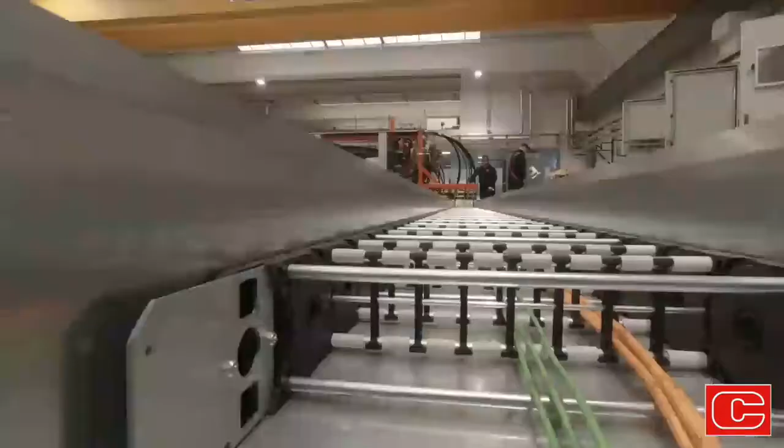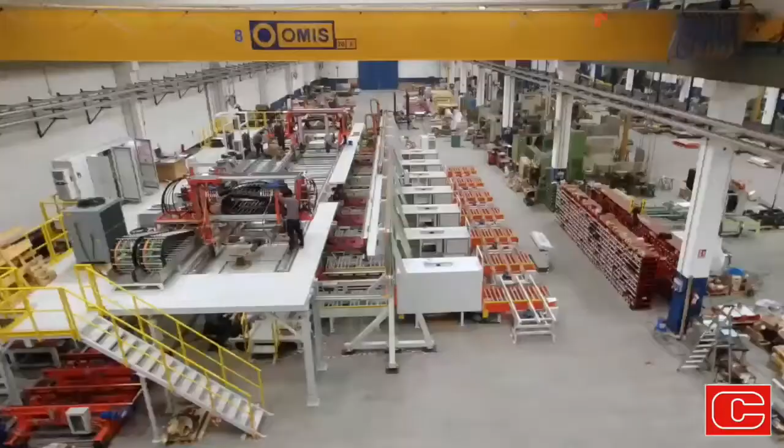Today we are in the factory we have dedicated to the white appliance industry. It's COVID time, but probably for the white appliance market it has been quite a busy one. Today we are going to see a couple of production systems for two market leaders in this segment, and both lines have been developed with a target to have high volume production connected with high-end products, so high quality.

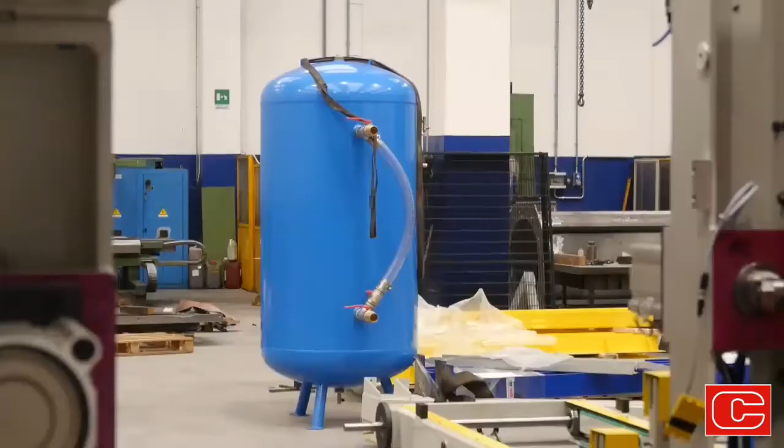We are here close to one fixture which has been designed for the use of the vacuum-assisted injection technology. It is a concept utilizing a small depression inside the mold with a target to increase foam flowability. Such a technology has been introduced in the market by Cannon a few years ago, and today we have supplied in excess of 50 lines worldwide. That's interesting. Let's go back one second.

We are going towards a period where, at least in Europe, a new labeling rule is going to be implemented. The refrigerator manufacturers are going to put energy efficiency labels on their fridges. Now, the old blowing agents, which were on one side dangerous for the stratospheric ozone layer over Antarctica, and on the other end dangerous for global warming, the climate change problem, have been more or less replaced, and the replacements seem to be working. They are more expensive, but they reach their target. Once we have said that, why should a customer buy a line with vacuum?

Yes, the use of new blowing agents, as you said, has the target to increase the energy efficiency of the final product. Anyhow, the vacuum-assisted technology has been conceived since the beginning with three main targets. The first one, formulations compatible with higher productivity polymers. Higher productivity means foams that are quickly reacting, generating fine cell structures, giving better thermal insulation properties.

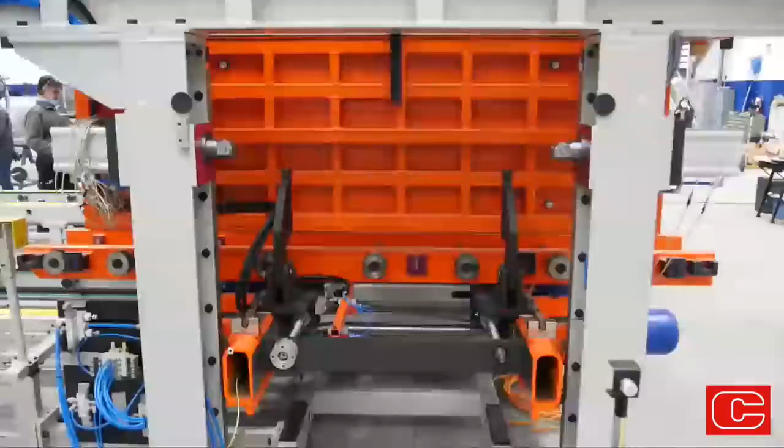Second target, higher flowability. It is clear that lower pressure inside the mold allows a better flow of the foam, so having the system compatible with the need of inserts, such as VIP panels, again with the target to increase the labeling of the product. And third target, productivity. The vacuum-assisted technology gives the chance to sensibly reduce cure time by 40% compared to standard formulations, so that the overall production can increase some 25-30% on average.

And how was this innovation of VAI accepted by the market? As we say, today we have more than 50 lines delivered. We have to say that China has been more reactive to this innovation. We believe the reason is that the vacuum-assisted technology gave Chinese customers the chance to go to a better product with no sensible R&D activity on blowing agents, first. Second, production increase. China in the last few years had a need to increase production dramatically. So these are the two main reasons we think are realistic. So they were faster to implement a solution which is now very modern, but they did it 10 years ago.

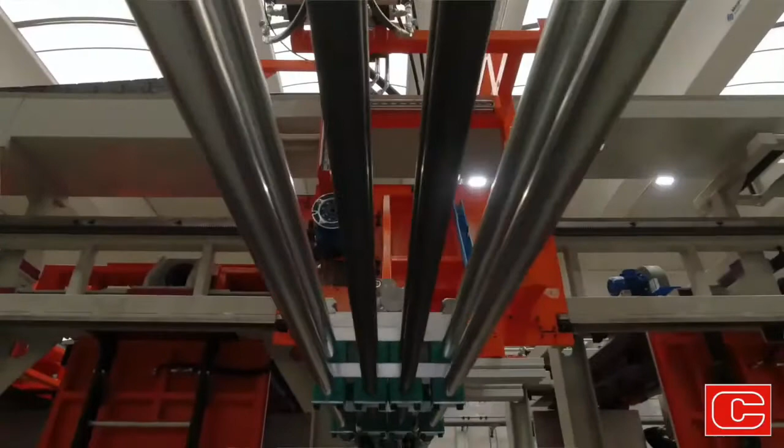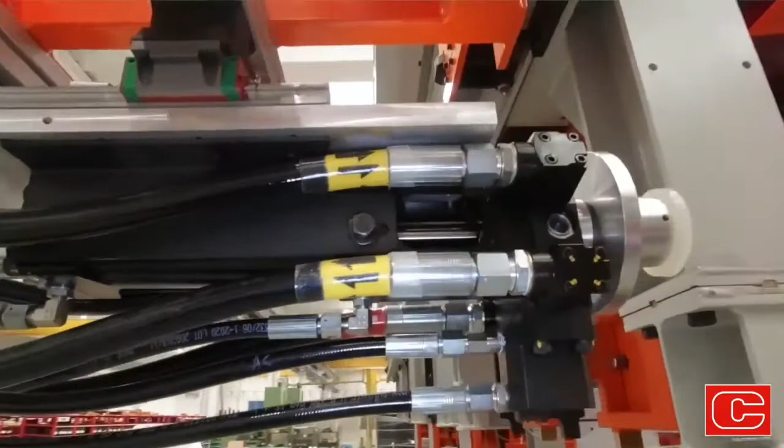Probably customers in the near future will face more problems with new blowing agents, such as HFO or LBA in general, because they are more sensitive to temperature and have less flowability inside the mold. Due to the high cost, customers may also request the possibility to play with different chemicals at the same time in the same line, for higher flexibility.

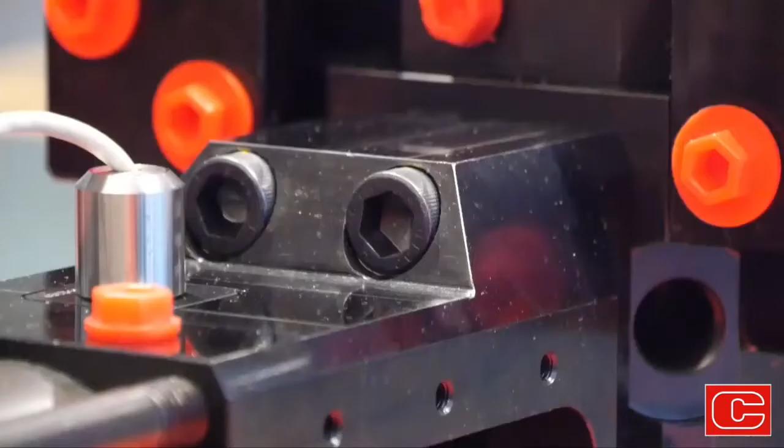And of course, for all these main problems, we have the solution. We have improved the temperature control of the machines. We have designed special equipment to handle different chemicals at the same time. We have a premix unit able to blend up to 4 chemicals at the same time. We have also designed a mixing head, not only a 2-component, but a new mixing head, an FPL-SR based mixing head, capable of handling up to 4 streams. So the customer can switch the chemistry from one refrigerator to the other, and maybe handle different quality or different types of product in the same line, for an extremely higher product mix on their line.

You have been mentioning the FPL SR 2 or 3 times during the last minutes. It's not here, let's go and see it installed on the plant. Yeah, see you in a minute.

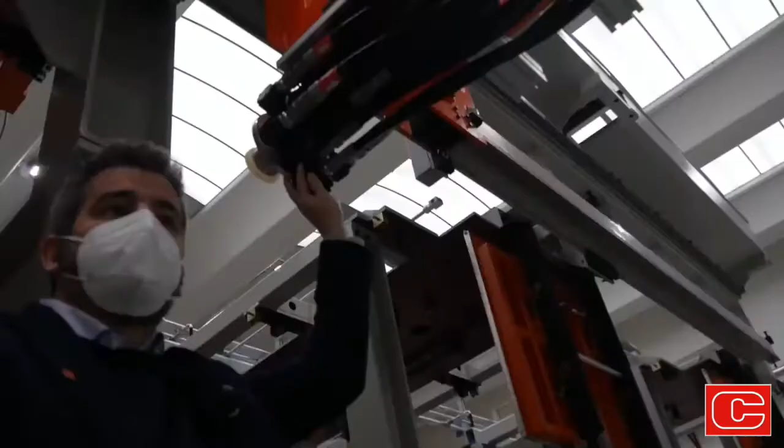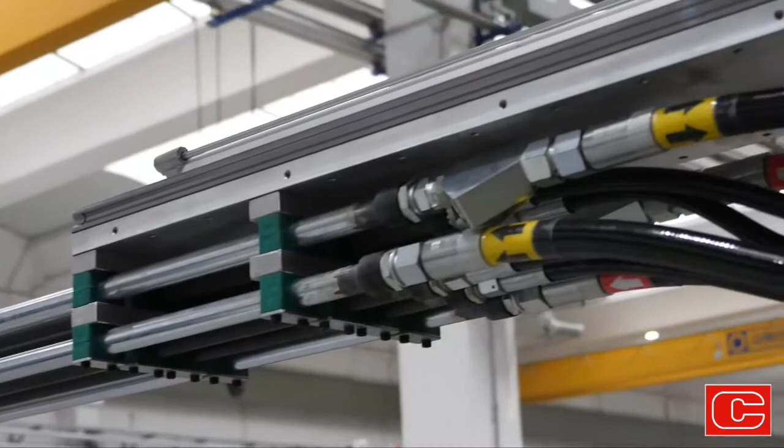So we were talking about our FPL SR mixing head. Here we have one already mounted on the mix head carrier. This is our masterpiece mixing head of the latest years. Why is it a commercial and industrial success? Because it permits higher laminar flow, so less bubbles, better quality for the customer, and better mixing quality compared to the previous models.

And also we have improved the maintenance of this mixing head, because the customer can change only the piston and the bushing of the piston, in order to have less cost for spare parts, but also maintenance that can be done in-house by the customer.

What is the characteristic of the head from the geometry, from inside? The geometry has been improved, creating a double-diameter shape for the self-cleaning piston in order to reduce friction. This also permitted us to increase the length of the nose to enter better into the customer's mold, and also to have higher laminar flow, which is really connected to the quality of the product.

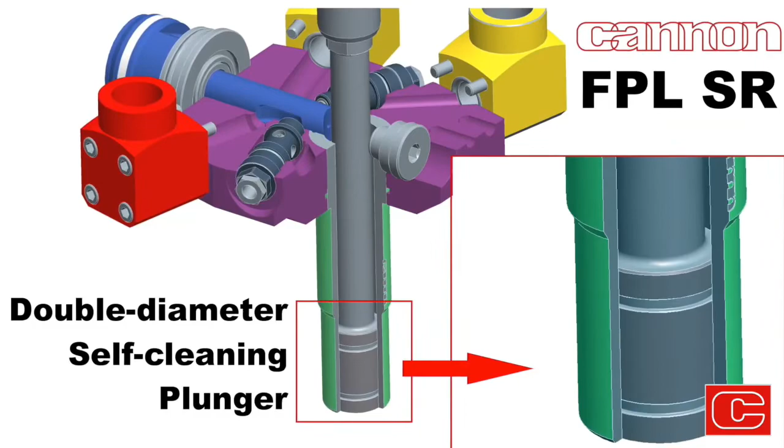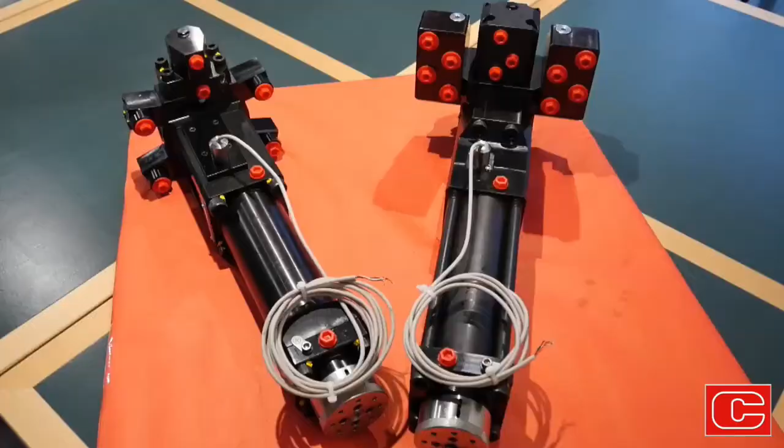How many models do you have of FPL SR? Nowadays we can say countless, because of course we have a standard model that has been designed and installed in many plants, but we are also ready to design a tailor-made solution for the customer. We have done one with a longer nose, for example, for the discontinuous panels market. We have done one with additional ports for color or for blowing agent also. And we have also done the 4-stream mixing head that we spoke about before, which is the new request connected to the blowing agents in the refrigerator industry.

I think that in this field, ensuring constancy of results and precision is one of the most important performances that you must guarantee to the customer. What have you done in this field?

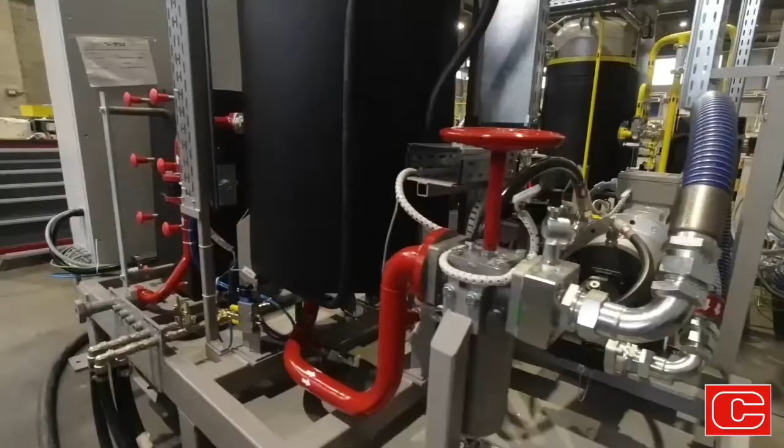Yes, for sure, quality control and the final quality of the product is more and more important in all the industry. To answer these needs, we have worked in several fields of our equipment. We have improved the control of the temperature, adding sensors in all the equipment, starting from the dosing machine to the mixing head, but also in the molds and in the fixtures, we have included many sensors.

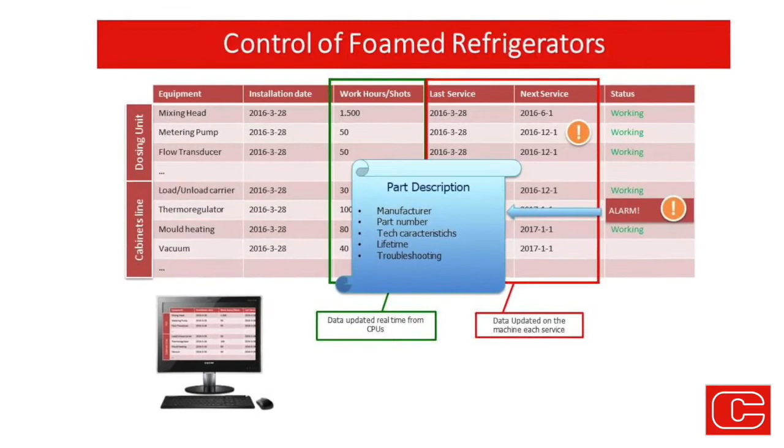We have also improved data collection, because you can control all the parameters, but it's also important to collect them in real time and make this data available to the customer. For this, we have also improved our supervising system with our Automata team, where we can provide a solution tailor-made for their factory, collecting all the data of the line in real time.

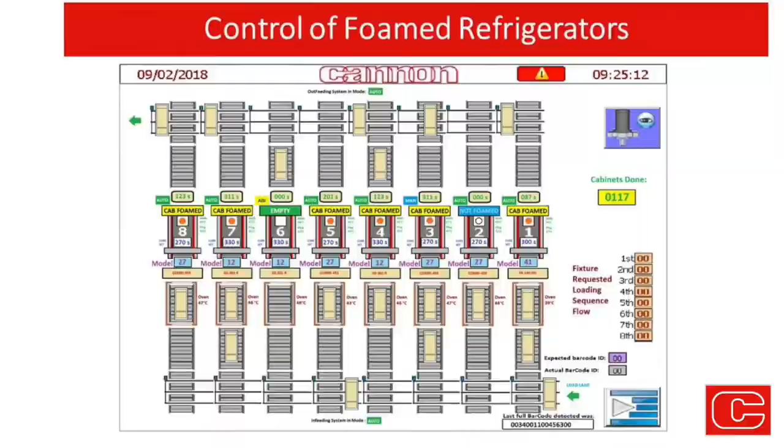And connected to this, we have also worked on preventive maintenance, because quality control for the product is important, but it's also important for the factory to have better maintenance, since maintenance is connected to cost. For this maintenance, we have studied a solution for preventive maintenance, including a vibration sensor for the pumps and motors inside the equipment, in order to continuously check the status of each component.

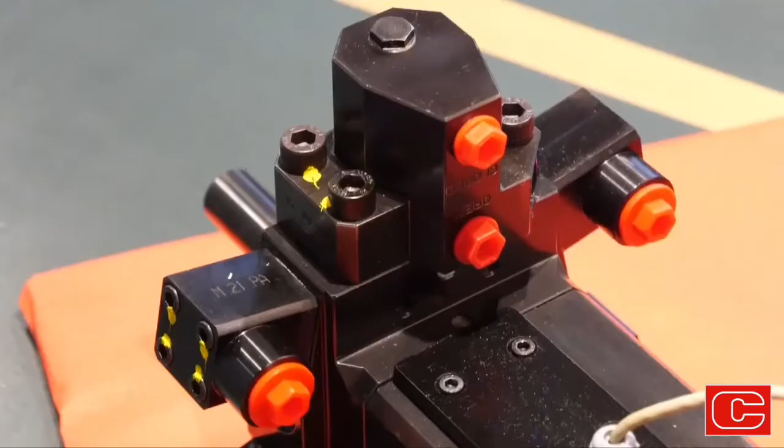But we didn't stop there. We also worked on what is the core part of the machine, the mixing head. For this, we have designed and developed what we call the FPL SR, but in reality, the new mixing head connected to this is the talking head.

A talking head, that is a mixing head capable of collecting data on temperature and pressure in real time, but also capable of collecting data on the wear of this mixing head, which is an important new point for us for predictive maintenance. That's very interesting, and I think it covers the whole supply of the wet side of Cannon in this field.

Alberto, besides VAI, the vacuum, which is a fundamental step in Cannon's refrigerator technology, what else can Cannon supply to refrigerator manufacturers? Well, obviously that depends on specific market needs.

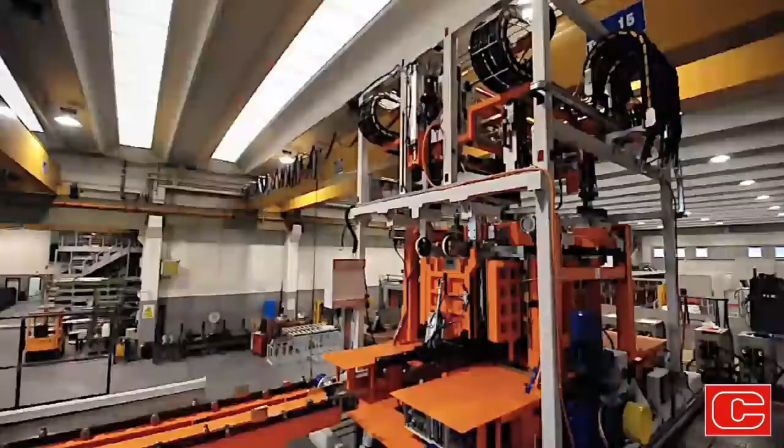Two examples can help explain. For customers who need to reduce floor space in a production environment, we developed a new solution we call Roto Jig, which consists of two fixtures assembled on a common base frame. The two fixtures rotate 180 degrees, reaching alternatively the upper position for cure operations or the lower position for service. This solution gives double production in the same floor space, improving productivity. That's for customers who need this.

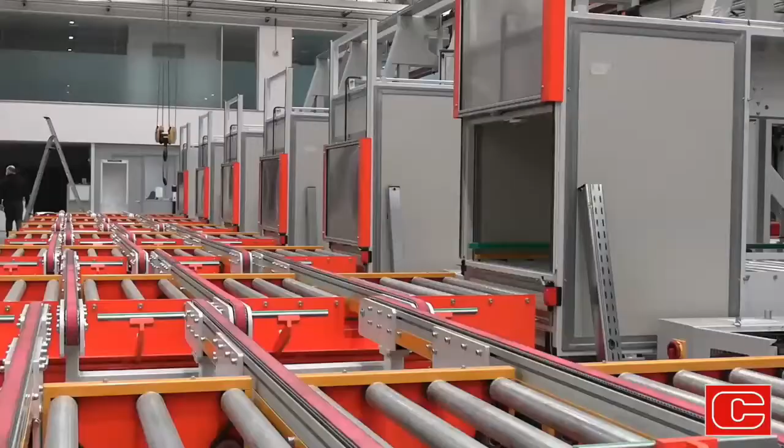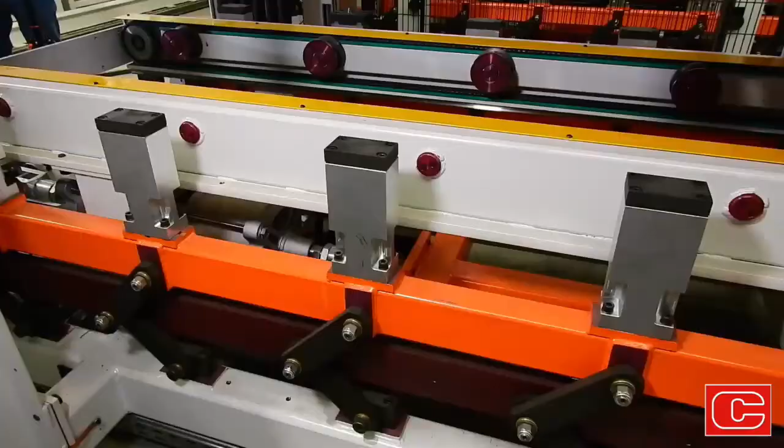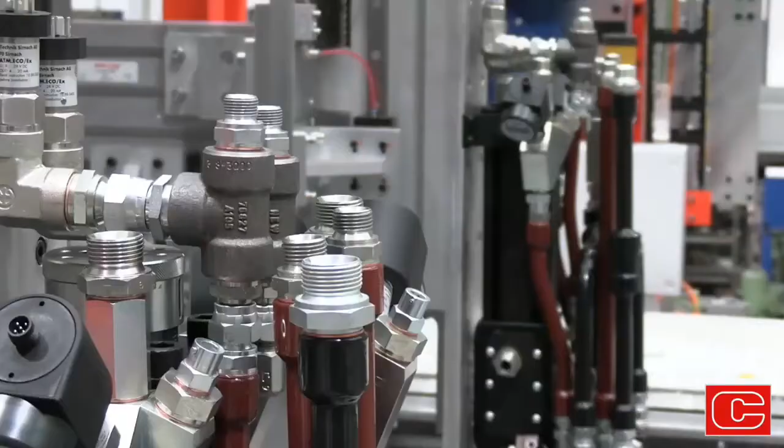Then we have other customers who are more focused on technical solutions requiring multiple injection points. For those customers, we developed new fixtures we call short stroke fixtures, where we succeeded in cutting machine time sensibly, some 15-20 seconds, compared to a traditional system with a much longer machine time, which has more impact on overall productivity. You are going to see an example of this line where the customer will work with a 4-point injection since he needs to use highly reactive foams.

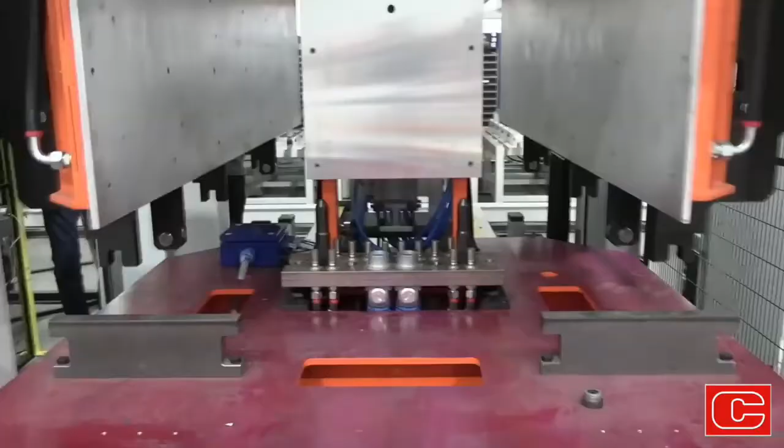So 4 heads mixing and injecting foam at the same time in the same cabinet. Simultaneously dosed by, I understand, 2 machines at this point. Well, 4 machines, four pumping groups. Okay, 4 pumping groups. And that's very interesting because this is a press which has a short stroke.

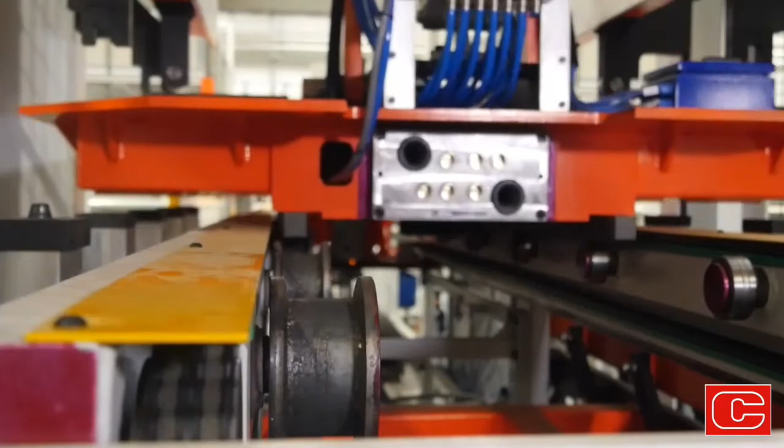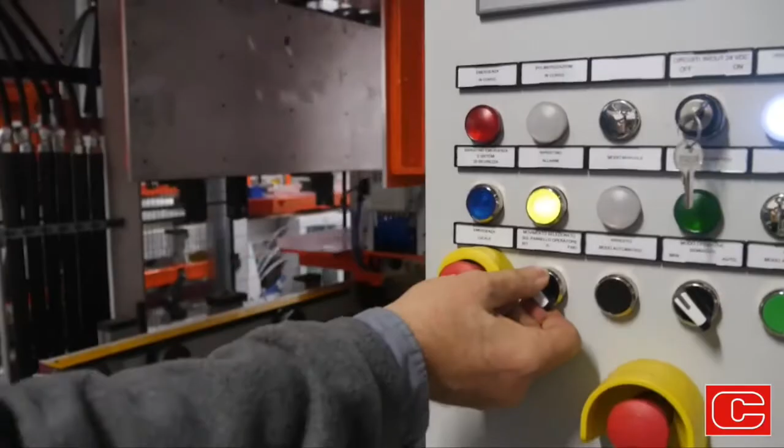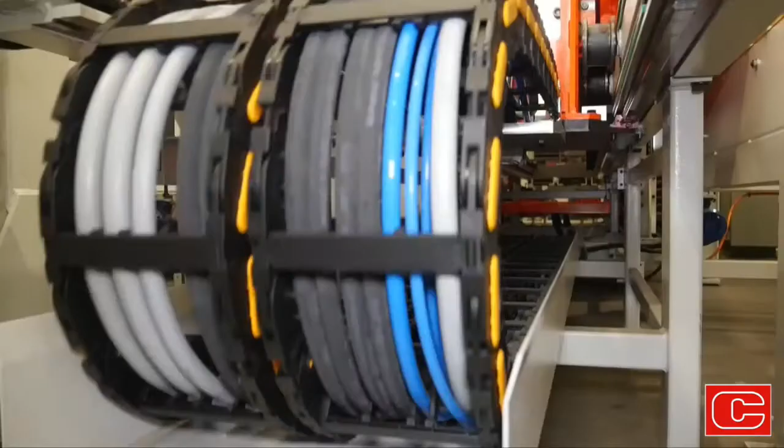I understand there are a number of advantages from the short stroke in addition to time. I'm thinking of the volume of the plant, the air that must be... Well, the short stroke concept is quite simple from a principle point of view. It is amazing to see, as you will see in the next video, the dimensions of the fixtures. So I would say besides time, which is very important, there's also the simplicity of construction.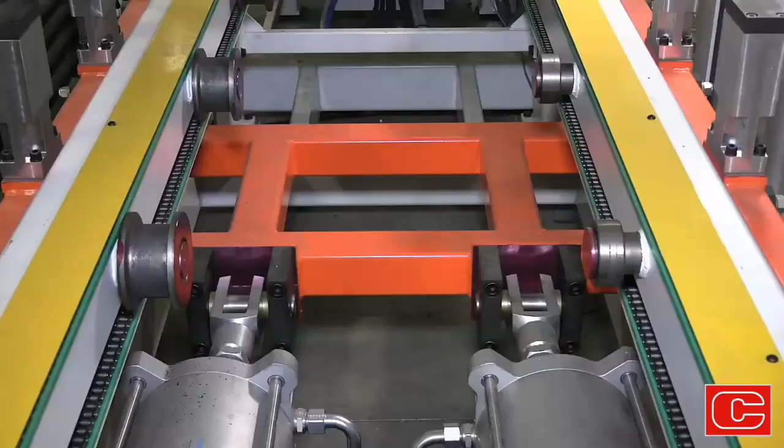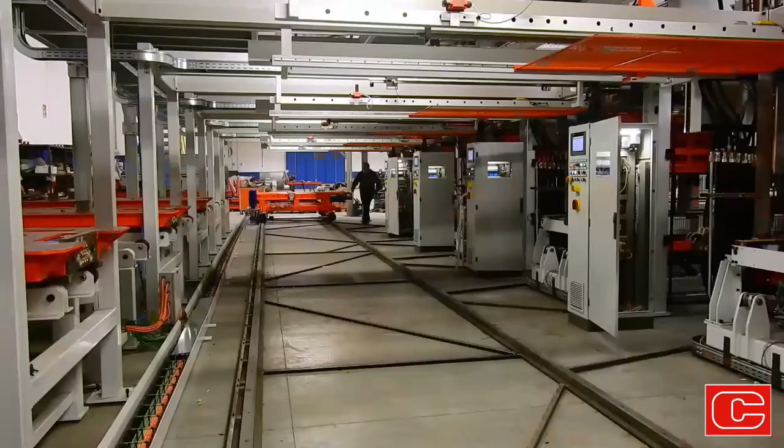And the ergonomics of the system. A man has very easy access to the complete fixture with no need of devices to reach any corner. I understand this is a patented Cannon solution. It's a patented solution, yes.

Final quality control in a market regulated by labeling and strict performance requests is becoming more and more important for manufacturers. What are you supplying in this field? Yes, that's a good point. The industry in general requires more controls to reduce scrap rate and have a more stringent control of production. We have a couple of examples for this market.

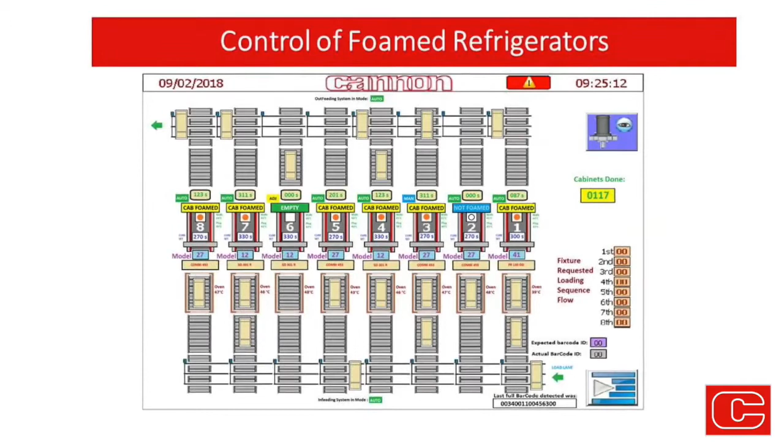The lines we supply include, for example, a weight check of the final part in order to compare this value with the one declared by the foaming systems, to verify that no errors are coming from the foaming section.

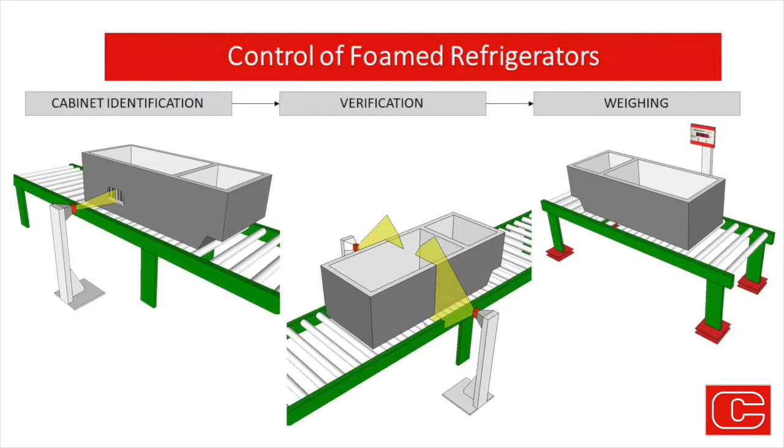Another example is a dimensional check. We have developed systems to verify the dimension of the cabinet at the end of the foaming line and compare it with the given values in order to verify if any part distortion is occurring, for example from an uneven or non-constant filling of the cabinet in all its parts. So a true 3D control of the dimension of the cabinet.

Absolutely. Is it done by laser? It's a laser system. Let's end this interesting discussion today with one aspect related to the door of the refrigerator. What are the latest news from Cannon about door foaming?

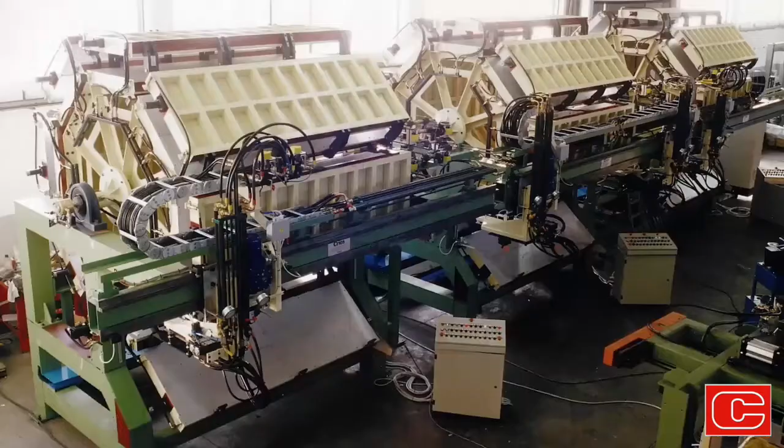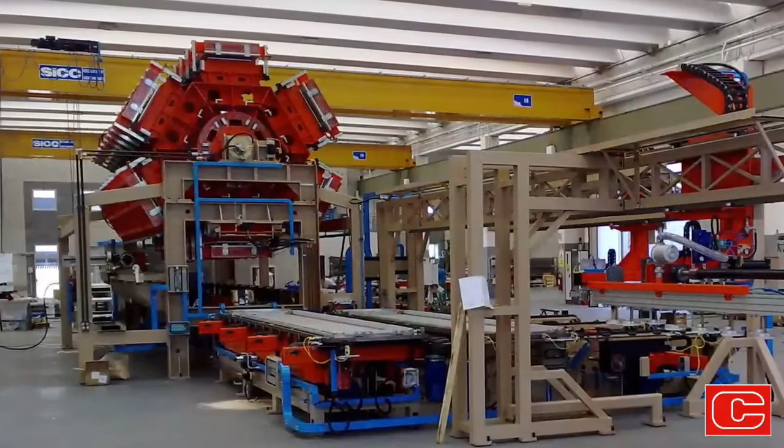Well, also for doors, there is a need to cope with more stringent energy labeling. Besides standard solutions we have developed on our own, we cope with different requests from customers, and recently we have made tailor-made solutions meeting, for example, requirements for very high production systems.

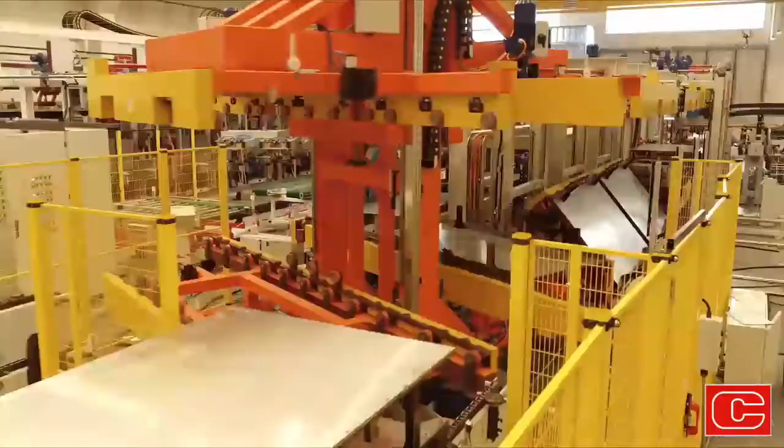One example is what we call the Wafer Line, which essentially consists of a rectangularly shaped production system where we do not have fixtures. The molds are assembled on standard base plates, which are conveyed around this rectangular line. The rear part is for cure operation, part unloading, and mold change in real time. The front part of the line is for part loading and open or close mold pouring.

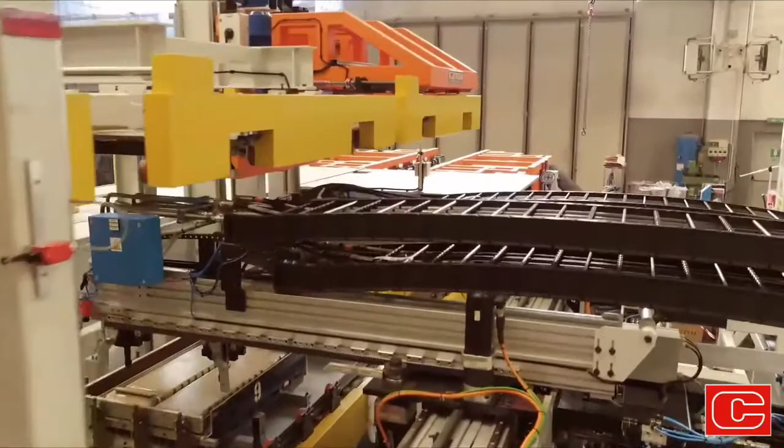So you transport molds? Yes. No fixtures. And that's another interesting concept.

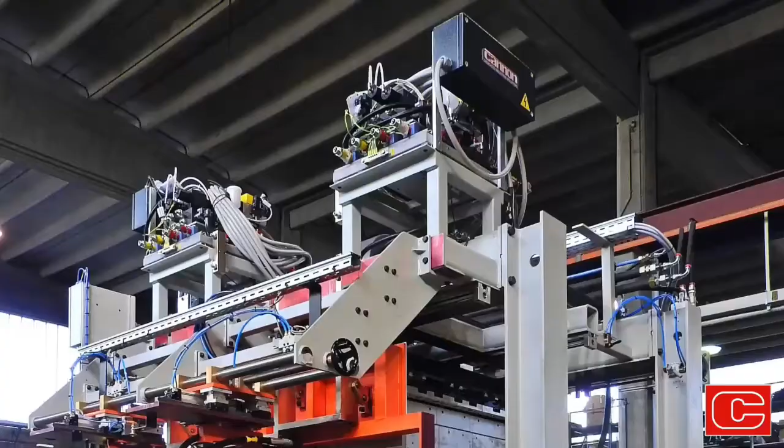We cannot forget that part of the market to which probably several of our viewers today belong, that make commercial refrigerators, not domestic, but those out of standard, or very huge dispensing machines, or refrigerators for takeaway, supermarkets, etc. What are you supplying in this field? This market niche is important for us.

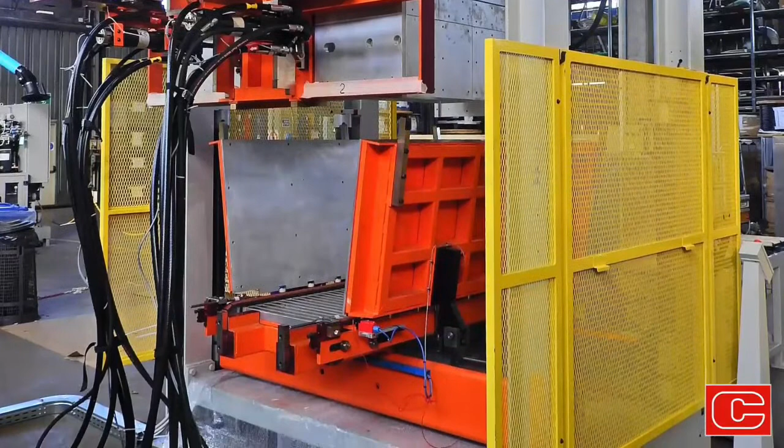For 10 fixtures we deliver for the domestic market, we have 1 fixture delivered to the commercial market. In this segment, we believe our customer benefit is the strong local service the Cannon organization can supply. Producers in this market segment are normally small, medium-sized companies, and since they are less structured than domestic refrigerator producers, this customer needs stronger support, especially for the wet part. So they see in Cannon a big value because of the local service we have worldwide, from Argentina to Kyrgyzstan. That's a very important aspect of the business—not only taking or delivering an order, but following the customer along its whole production line.

Well, I think this covers the dry part of production of domestic and commercial refrigerators for the moment. We will see in a few minutes another aspect of this production, which is the wet part—the production of dosing and mixing heads in Cannon Afros's factory.

We are today in Cannon Afros with Francesco Abba, Sales and Marketing Manager, and Jari Pietrafesa, Sales Specialist in Insulation and Rigid Foams. Francesco, can you briefly introduce yourself and tell us what we are viewing today? Thank you, Max. Welcome, first of all, to all of us here in the Afros workshop.

Afros is the company within Cannon Group specialized in engineering, selling and servicing multi-component dosing and mixing equipment. This means we have provided to the market till now about 15,000 dosing units and about 30,000 mixing heads, and about 50% of this machinery is dedicated to insulation and refrigeration. Let me say that refrigeration is the market where we are absolute leaders today, and have been for the past 50 years. So we are going to show you something very interesting today, related to what you can see behind me, on my shoulders.

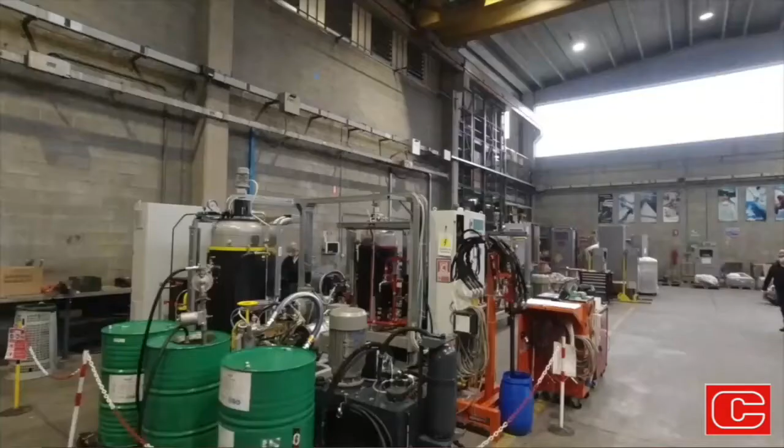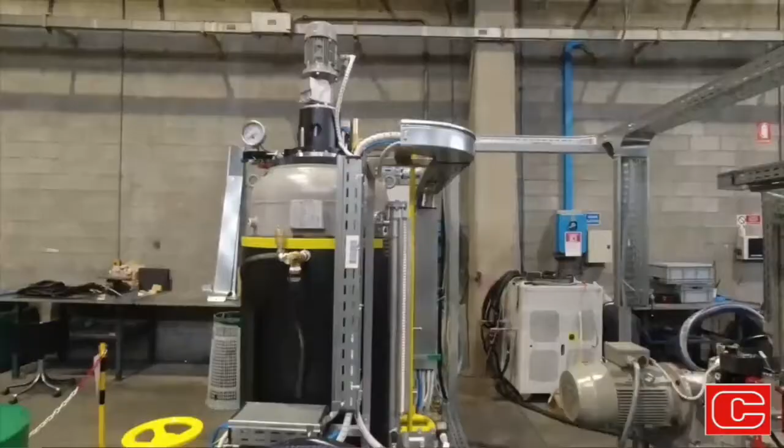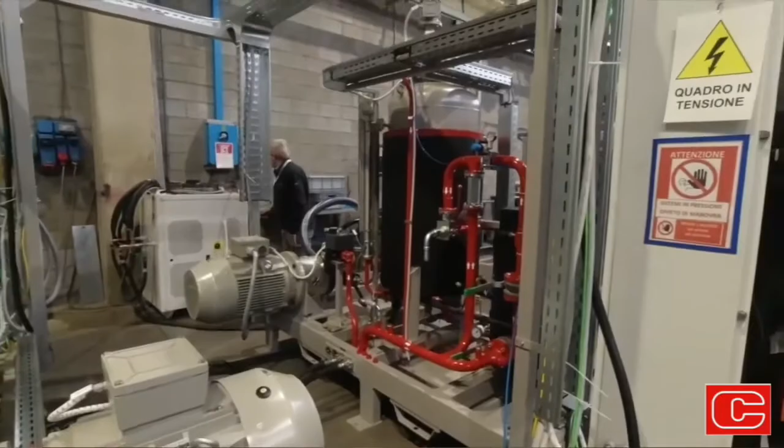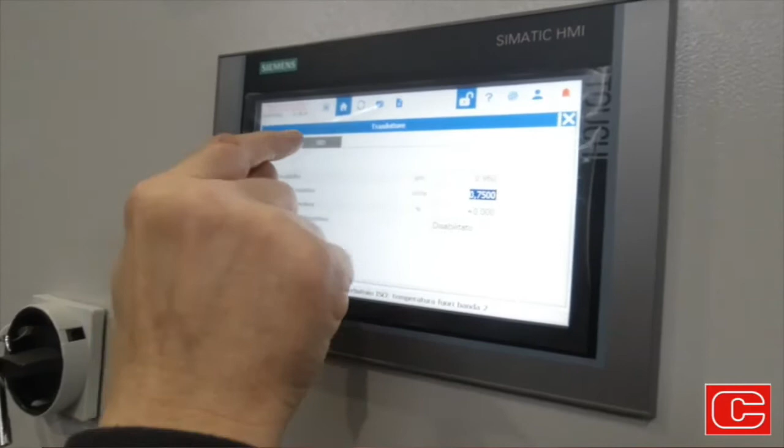Here we see a dosing unit related to refrigerators—refrigerators manufactured in millions of pieces all over the world, and we serve our most important customers worldwide. Generally speaking, we have a dosing unit and mixing heads that we'll see in the next few minutes, when there will be the possibility to see the complete package we are going to propose, especially some new things under development right now. This is a very important feature—to be innovative, to be the leader of the market, which is very competitive and sometimes asks for very complex solutions. In this case, we can see a machine fitted with pentane, and there are other blowing agents that will be included in our machine configuration, which Jari will speak about in more detail later on.

Thank you. Jari, Cannon Afros is the company to talk to when we speak about wet. What has the market been requiring from your company in recent months, let's say?

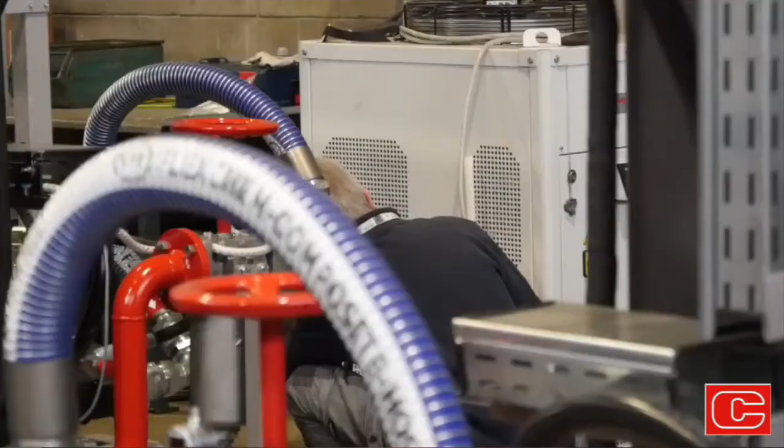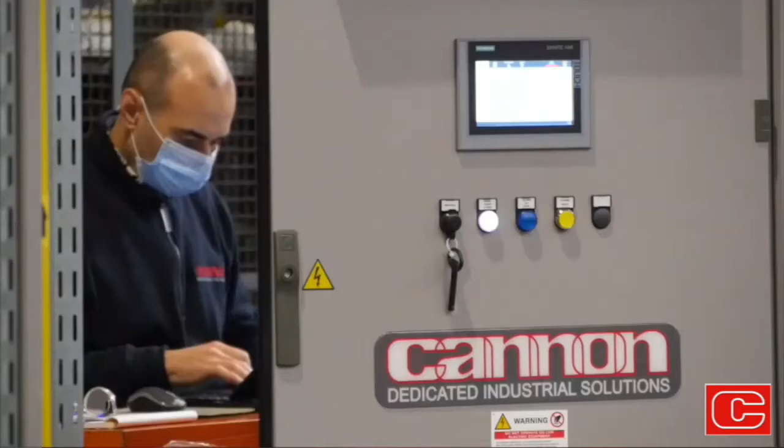Following the new labeling system, refrigerator producers are now facing a tough challenge. The new system asks for 20% more in terms of energetic efficiency for each single energy class. In other words, the current A+++ becomes D or E, while the new A class will ask for 60% more efficiency compared to the actual A++.

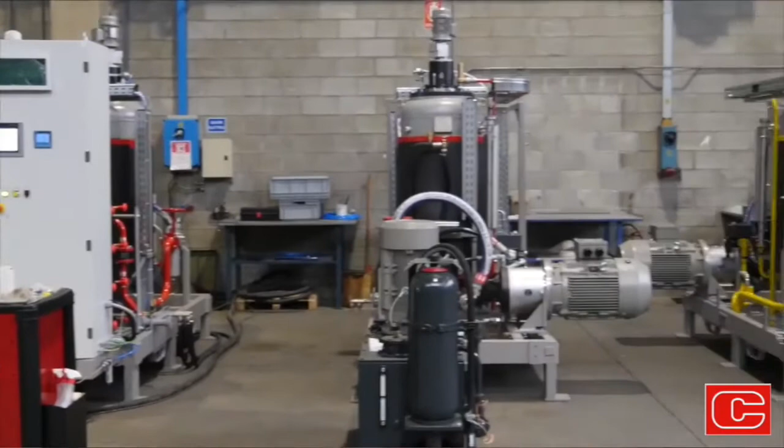This is why customer requests are mainly related to the improvement of the quality of the insulation, trying to keep a reasonable cost of the final product. What are you suggesting to solve these problems?

The blowing agents have an important role in this scenario in order to improve the insulation quality of the foam. For this reason, we develop many different solutions in order to meet the customer expectations. For example, starting from our premix unit, a multiple premix unit, we call it Multi-Easy Froth. That's a blending machine that permits the customer to blend together more than one blowing agent together with a polyol, independently or in a combined way.

Going through the machine, we can also talk about our multi-component mixing head, especially dedicated for the refrigeration sector. For example, our FPL SR 26/4 is already in use by our customers, especially for cabinets injection. With this mixing head, customers can easily choose which polyol in combination with the ISO they would like to mix for the injection.

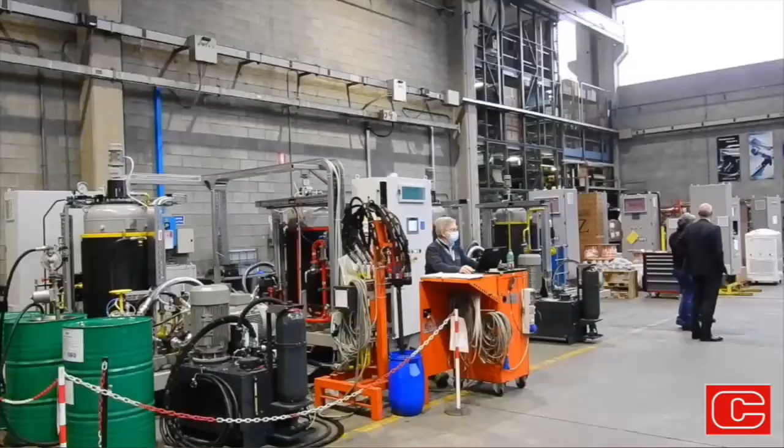Thank you. Surely, Jari, you have more details on these developments that we have done in chemistry treatment, metering and mixing. Yeah, talking about the fast formulations, let me say that fast formulation needs necessarily an increased output from the mixing head. This is because we need to close the complete pouring cycle within a specific time.

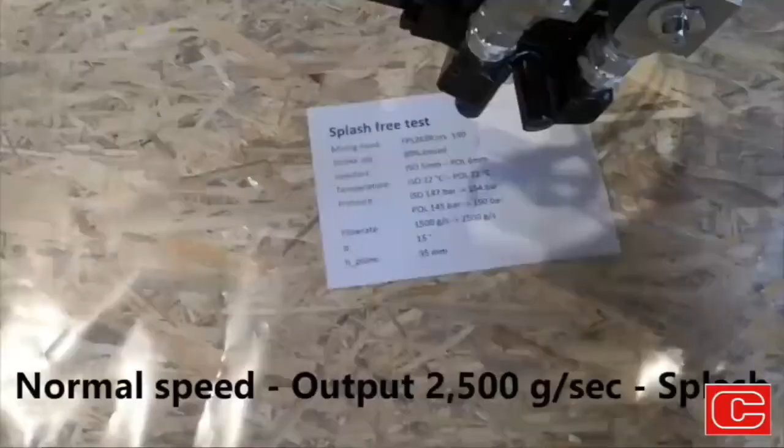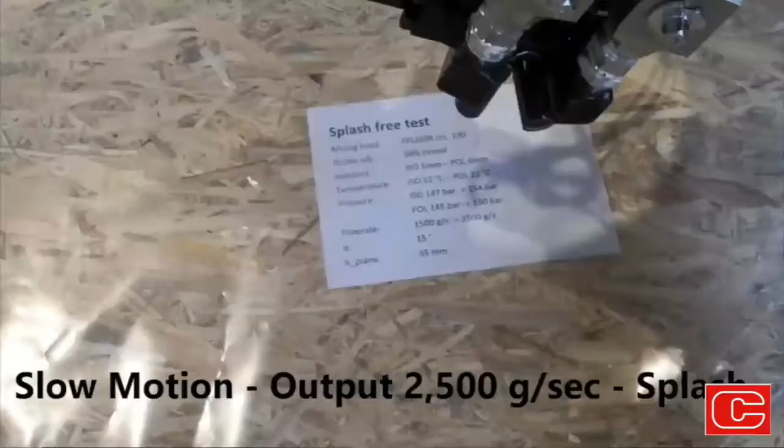Unfortunately, increasing the output with the same mixing head creates more turbulence and creates what we call the splash effect. Especially we can see it on open mold doors production, where the turbulence and the splash effect have a very bad effect on the structure of the foam. To solve this problem, we developed and patented a new technology related to the variable output during the injection.

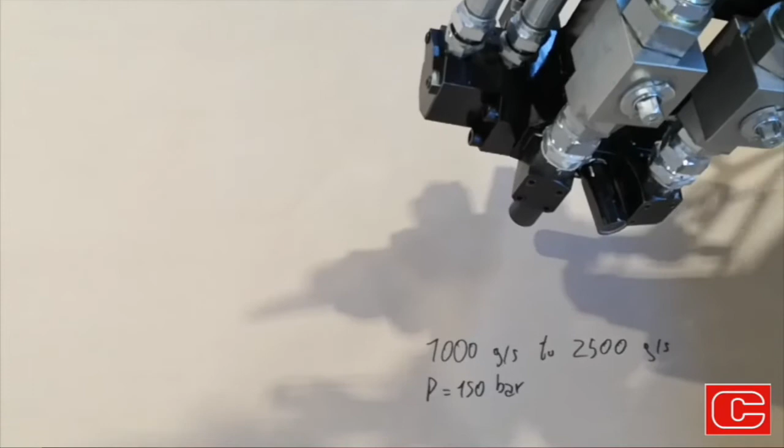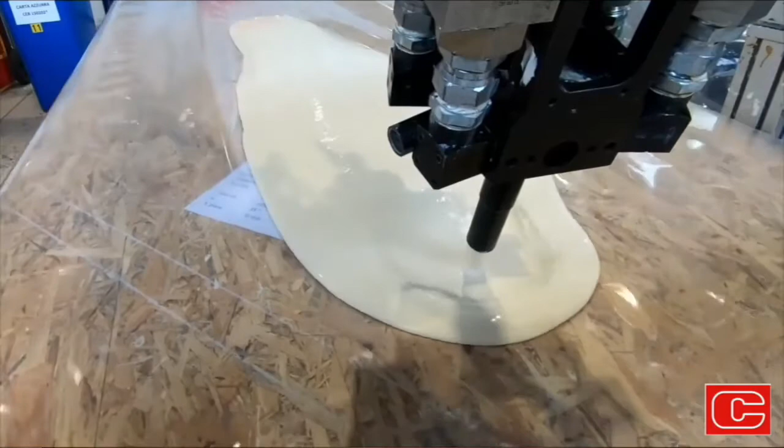At the beginning of the pouring in an open mold, we start from a lower output in order to avoid the splash effect. Then, during the complete pouring cycle, the output of the machine automatically increases to cover the complete quantity of foam within the cream time. So you start at low level and then you increase the rate of output during the shot.

The mixing head starts the pouring with a low output, so exactly we avoid this splash effect, we avoid damaging the foam, and then to close the pouring cycle within the specific time given by the chemical supplier, we increase the output during the injection. This kind of technology is possible thanks to our new generation injectors. We call them NoW injectors, which is the nickname of no-wave injectors.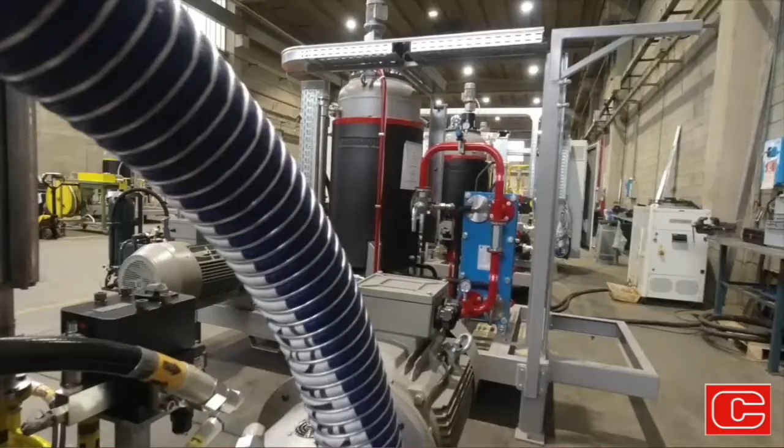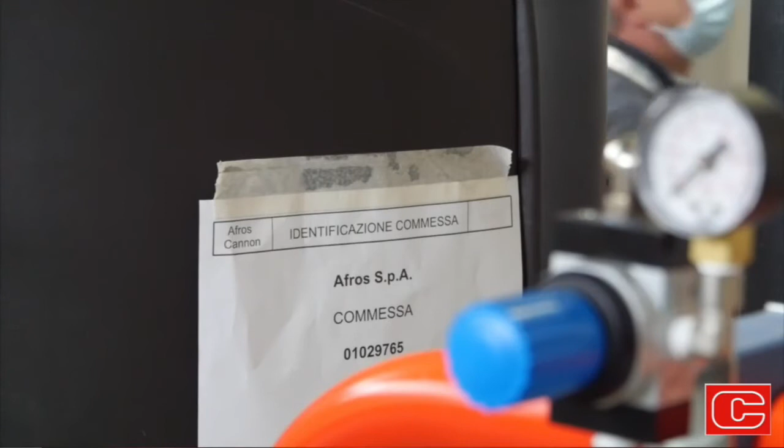The main characteristic of these injectors is that without any external operation during the pouring cycle, we can keep the pressure constant even if the output is changing in an important way. It goes without saying that to meet customer expectations, Cannon guarantees high reliability of the machine and the mixing head, a perfect laminar flow, easy maintenance, spare parts availability on a local basis, and a quick reaction service, especially in this particular period of big change.

Thank you. And talking about mixing heads, Francesco has been at Cannon for more than 50 years. Can we show our viewers something more specific about the heads? Let me say that our research and development program has been developed in the past years to accommodate the new chemistry coming to the market. We came on the market with a new mixing head; multi-component mixing heads are now on the market also for refrigerators. This was not common in the past.

We have, as Jari said, new nozzles, but above all we look forward to having something more. The expectations of the market are very, very high in terms of quality and reliability of the components that we offer, and that's why we will have a look around in a different room, and please just wait a few seconds to join this room to show you something very interesting. Thank you, Francesco. Thank you. Let's go.

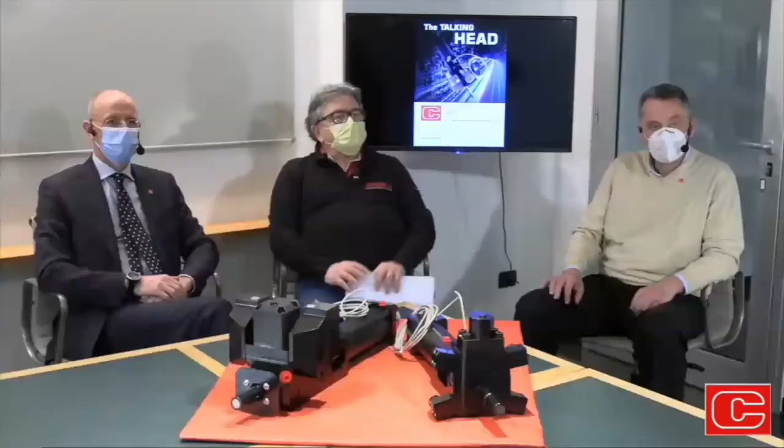Welcome back, ladies and gentlemen. We are now with Maurizio Corti, Corporate Technical Director, who will explain what's going on in Cannon Afros as far as the mixing heads are concerned. The mixing heads are produced in our factory, the factory of the Micromech group, and each part of the mix head is mechanically measured and tested. We measure all the geometry through a modern 3D measuring machine. We check the hardness, the roundness, the quality of the heat treatment, the clearances between the pieces, and all the mechanical parameters.

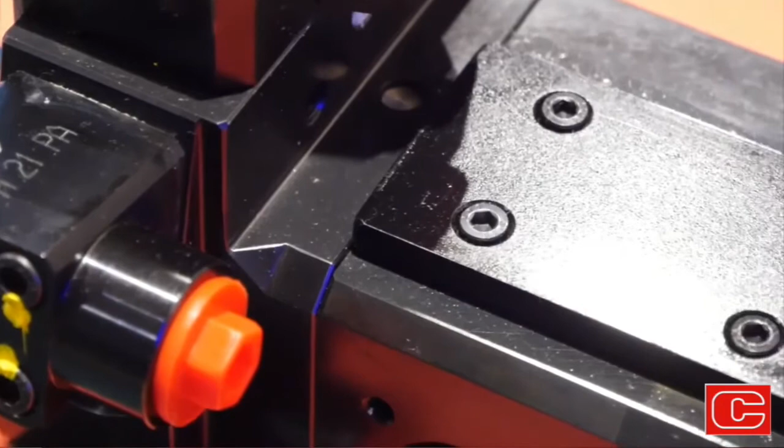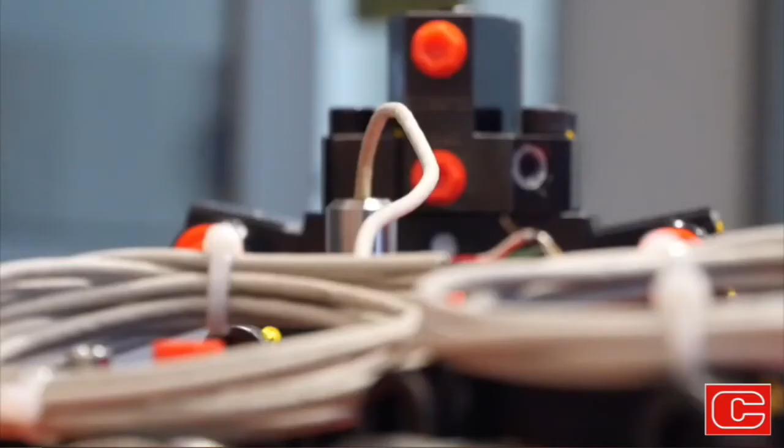These data are transferred to the identity card of each mix head, and we use this data not only to check the quality of the production, but we can transfer the basic data to our service system and to the location when they are servicing the mixing head, or when a customer needs the replacement of one part. We can reproduce this part as it should be done for the specific mixing head. So we have been sure for years that the quality of our mix head is as we want and is the best also for our customers.

How many mixing heads do we make every year? More or less, we produce 1,000 high pressure mixing heads, depending on the year, but the average rate is this. 1,000. What's new with the mixing heads, Francesco?

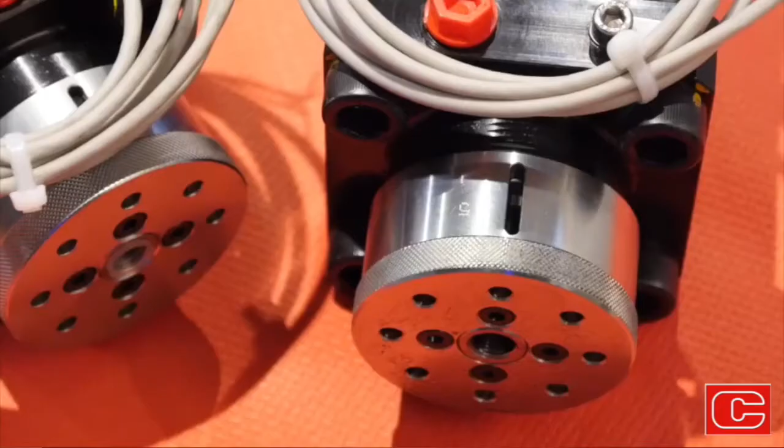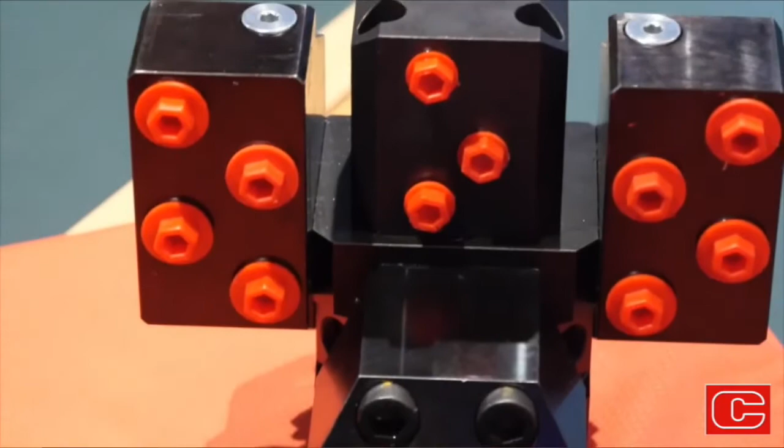We selected this meeting room because this is the meeting room of our R&D department. Frankly speaking, what we have in front of us are the two latest developments of our SR mixing head, which is our workhorse related to insulation. This brand new design of mixing head has been adapted in order to host a number of sensors.

We can host up to 30 to 35, if I'm not wrong, Maurizio, different sensors on the mixing head in order to get all the information and the big data that are interesting to detect the continuous functioning of the heads themselves. This, for us, will be the future. The sensorized mixing head will be more and more important in the future development of Industry 4.0. So we are already, let me say, in front of the expectation of the market.

These are patented mixing heads by our research and development department. These mixing heads are already validated at some of our customers. They will be available on the market, let's say right now, because we have enough stock of mixing heads in our storage. So we can serve the market perfectly on this subject.

How do you call them? We selected a strange name. We are saying that these are SR mixing heads, but they are talking heads. TH, talking head. Do they really talk, Maurizio?

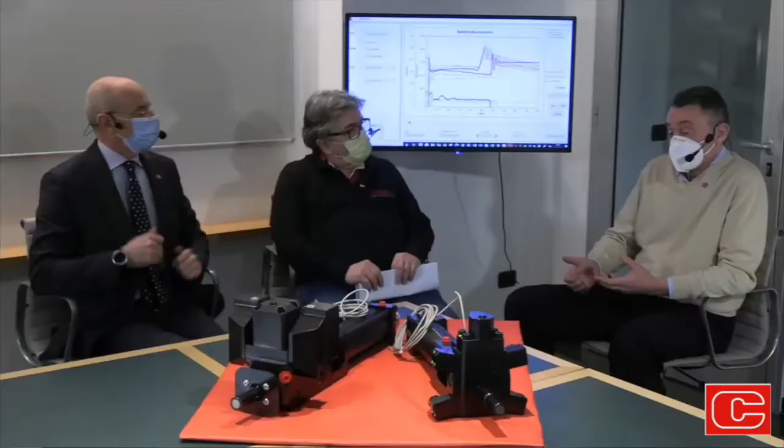These data are normally transferred to our software, to our electronic control, and the software is recording the data that are coming from one or more sensors. In this case, we have 4 sensors, and we can see and measure the drifting of the parameters outside a certain threshold. What we can consider a normal working process of the mixing head should stay within some field. When the data that we record drift outside the field, it means that the process is going to be modified.

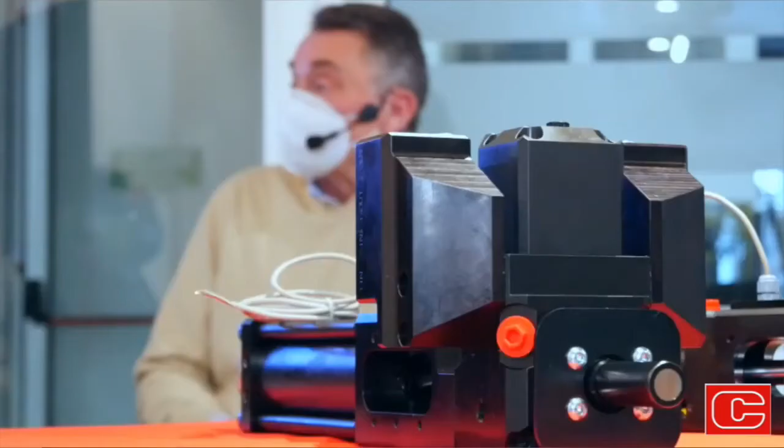Normally, with the actual checking of the mixing head and all the parameters, when the drifting is too much, we have the stopping of the process. But the software now permits us, and also our customer, the person responsible for the process, to see what is happening on the specific mixing head or on the group of mixing heads, to detect if the drifting is too much, and to see the tendency of this phenomenon.

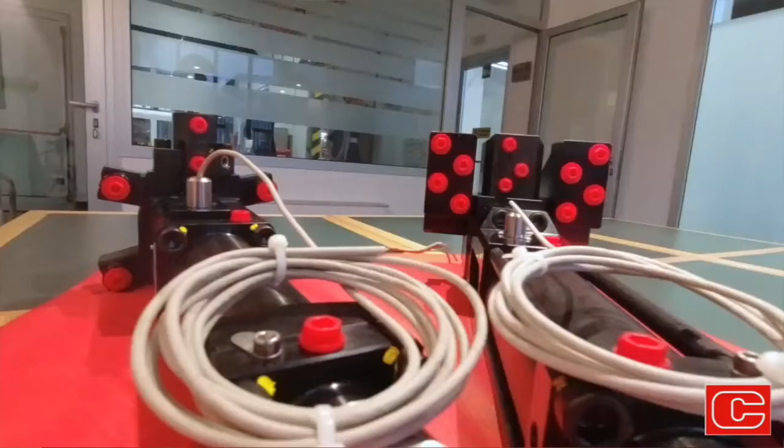So it is possible to make preventive maintenance, but also to correct possible errors in the foaming, in the plant, and so on. So it's a very powerful tool that should be implemented on the mixing head, and that is very interesting for our customers, because they can see the process without peeling the pieces, without checking the pieces physically, or it helps reduce the checking that must be done to guarantee their quality.

And I imagine what happens in a multi-head line where you have several mixing heads under stress. At the end of a shift or a day, you can have an idea if there is a need. It is possible to compare the performances between one head and the other, to see on the head what is happening on the dosing unit also, because normally we measure the parameters on the dosing unit. Now we measure on the mixing head, which is quite different.

And also to understand if the chemistry is changing. For example, the temperature or the pressure is changing during the day due to variation of the temperature. And this is very important for the quality of the pieces that the mixing head is going to produce. And being digitally available, I understand that they can go in a central storage. Yes. Obviously, all this data shall be filtered and selected.

Sometimes we measure just the peaks, or sometimes other parameters, and we can also apply recursive software that is, let me say, understanding the tendency and giving a preventive warning, not only the warning, but finding where the parameter is going. That's very interesting. Thank you, Maurizio.

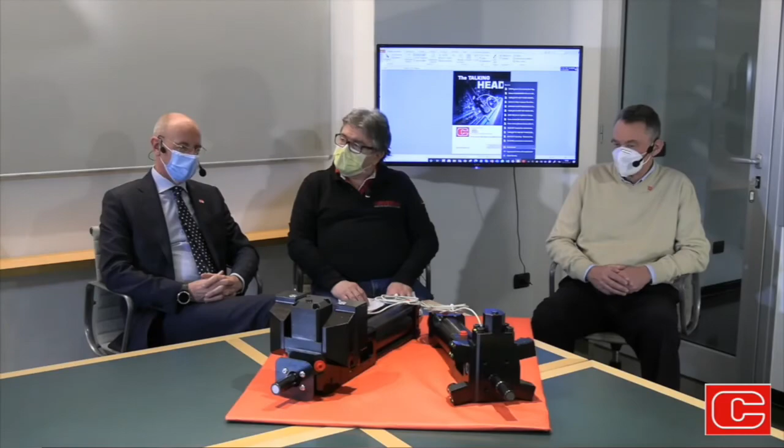Francesco, do you want to add something to conclude this session? Yes, let me add some information on this mixing head. These products are now available on the market. They have been developed by our R&D department. They have been tested, and now they are available also in our stock. So we are proud to say that we can serve them to our customers, including spare parts and all the tech service that is needed to support this kind of mixing head. As you can see here, we have two sizes and two types of different mixing heads.

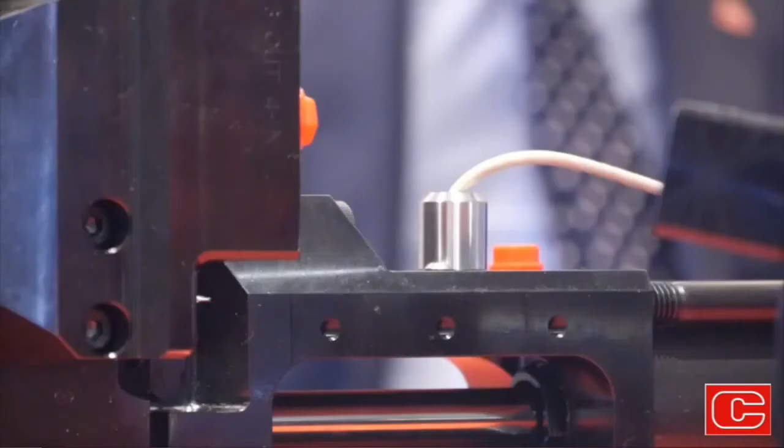One is a 2-component, the other one is a 4-component mixing head. This is due to the fact that we want to absolutely cope with the customer needs related to different chemistry and different kinds of products. I cannot say something more because I wish that curious people and the people who are looking forward in the future will contact us and ask us for more information related to this product.